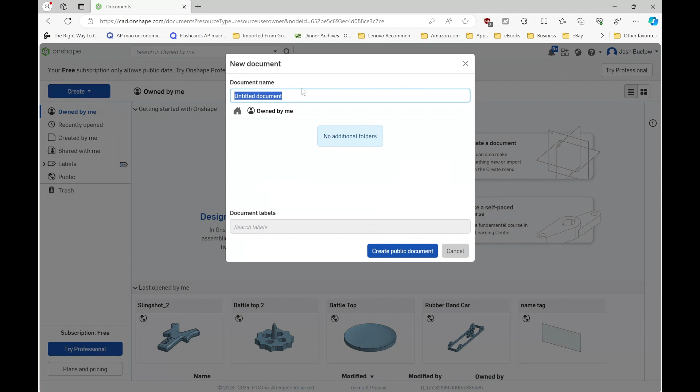Once we're in the workspace, we're going to click this top plane and make our sketch. I'm going to type N so that I'm looking right at it as soon as it prepares the sketch. So type N, and there we go.

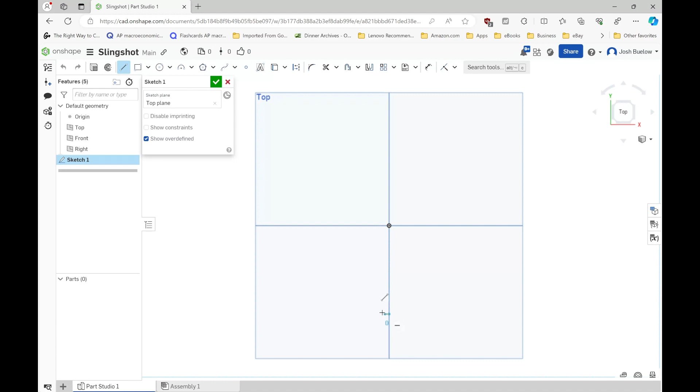Alright, so I'm only going to draw half the slingshot because I'm going to be able to mirror it. Directly below this center origin point, you can see it's highlighted orange, so I know that I'm on that. I'm going to click, go horizontal, go up, over at any angle, and back to the origin there.

And there we go. Now I'm going to dimension this. So actually, before I dimension it, I'm going to mirror it.

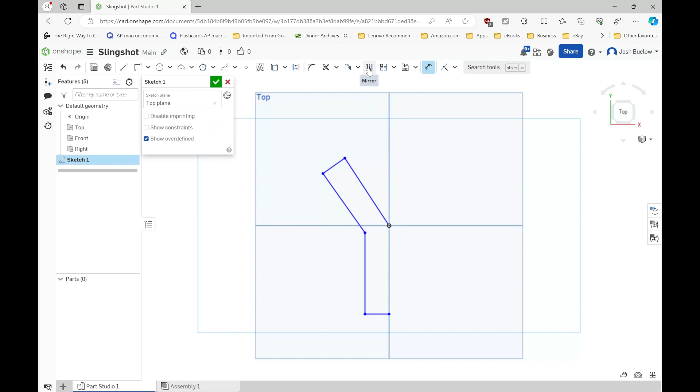So this is the mirror tool right here. I'm going to click this center line, and then I'm going to click everything that I want to mirror across that center line, like that. There we go. Now you only have to draw it once instead of drawing all these lines twice.

And if I dimension things afterwards, it will still stay correlated. So if I choose this right here, I make this 15, it'll make the other side just as big.

Now there are a few constraints I need to put on here, such as parallel, so that these two lines here are parallel, like that. And then I need to do a bit more dimensioning.

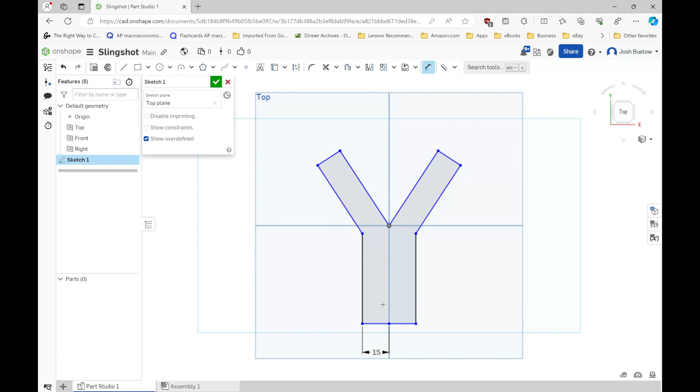So between the origin and this bottom line, I want to make that 85 millimeters. And I already know how wide I want it to be. I already got that dimensioned, but I need to decide how wide I want this to be.

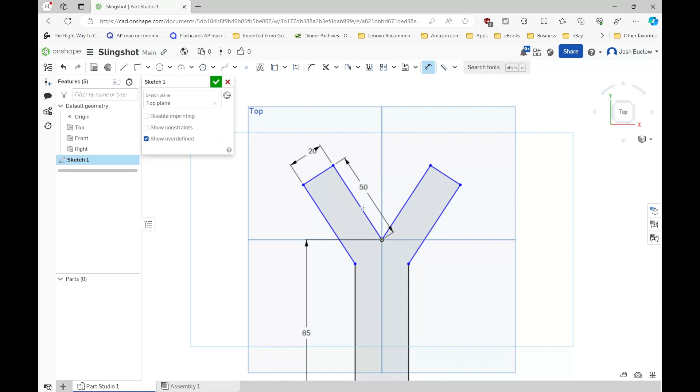So let's make that 20 millimeters. And let's make this 50 millimeters long. And let's make this angle 30 degrees. There we go.

So as you can see, this is our base shape of our slingshot. So I'm going to click the green check mark. There we go. And then extrude this.

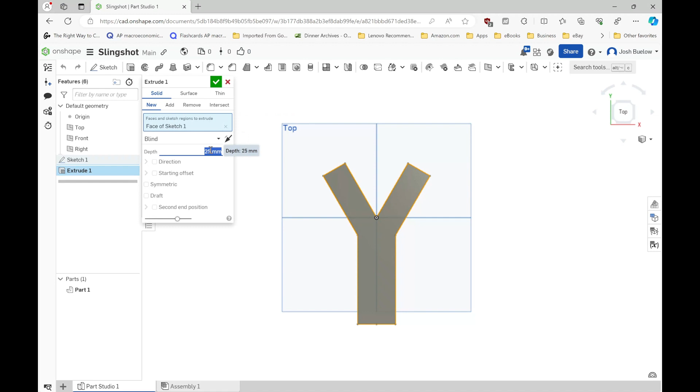So I'm going to click on my sketch face and click extrude. And I want this to be 15 millimeters thick.

There we go. Now obviously this won't work just as you can see it because we need somewhere for the rubber band to go for the slingshot.

So I'm going to make a cut by first making a sketch. Click on this face, type N so I'm looking right at it, and click sketch.

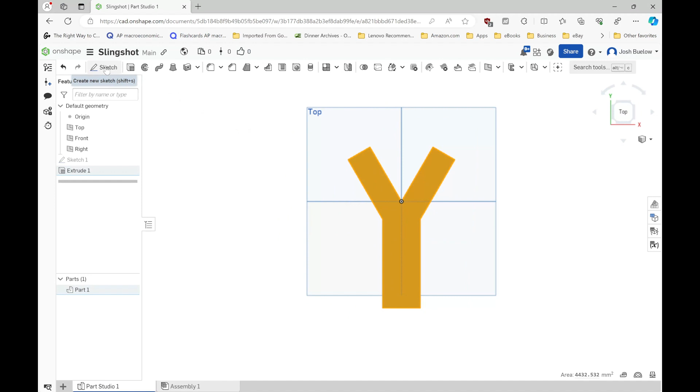There we go. We're going to use mirror again to make this nice and easy, but you're going to use this rectangle tool, click the arrow for the drop down, and click aligned rectangle. Now I'm going to click about the center on here, click 2 points, and drag down.

This is a way bigger slot than I want, so I'm going to change these dimensions. I'm going to make this 2 millimeters wide, and then I'm going to make this 10 millimeters deep, and click escape, and then I can drag this anywhere I want.

I mean, it doesn't have to be exactly in the center, but get as close to the center as you can. Now I'm going to use the mirror tool.

Once again, click the line I want to mirror it across because I want this box that's going to become the slot we cut out over here.

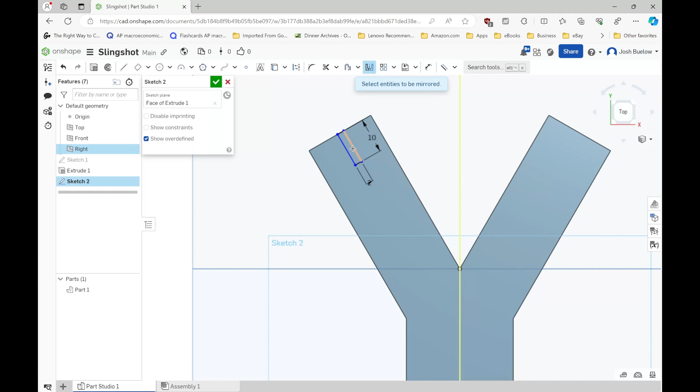So I clicked my line I want to mirror, and then I'm going to click all of the lines that I want over there, and you can see they're appearing as I click them.

There we go. So now we have our whole box on both sides. That's going to become our slot.

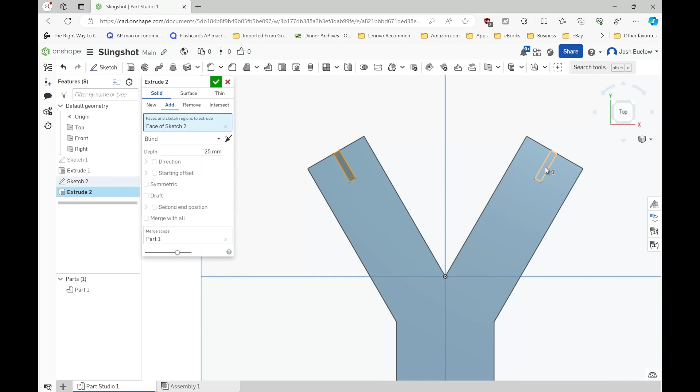And we're going to click extrude, and 1, 2. There we go. And we want to remove material because we want to cut this slot out just like that, as you can see. So green check mark. And there we have it.

So before I go and add my fillets to make this nice and smooth so it doesn't cut into your hand while you're using it, maybe I want to make this look a little bit cooler.

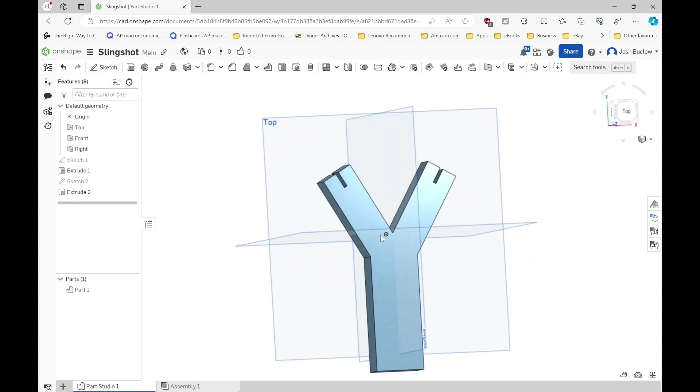So if I want to do that, I can go back into my first sketch, double click it, type N so I'm looking right at my sketch, and maybe I want to add some like spikes down here or something. So I click the line tool and click pretty much anywhere I want on here.

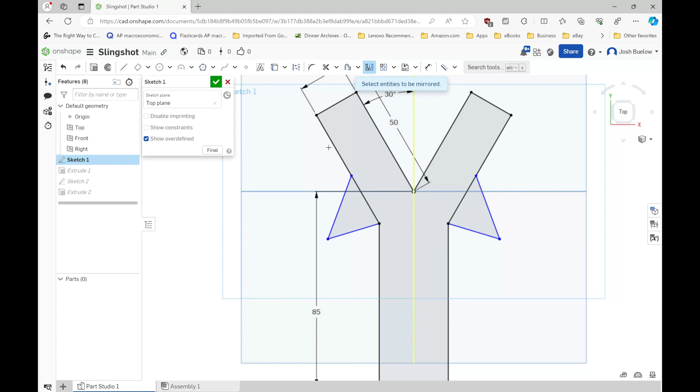Do something like that. Maybe that's the kind of spike I want. I'm going to once again mirror it across this plane here. Click the entities I want to mirror. And there we go. Then I just need to get rid of this line here and this line here so that it's one continuous outline, and it'll extrude differently. I think that looks pretty sweet.

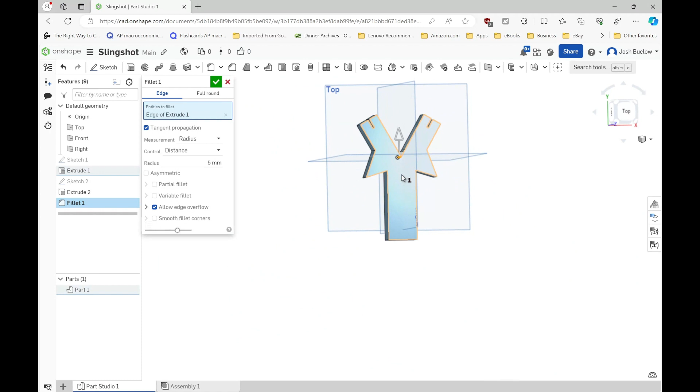Next thing we're going to do is add all of our fillets or rounds to make it nice and smooth, so it doesn't cut into your hand. It's going to default to 5 millimeters, and that's what I want, so I'm going to go 5 millimeters there and there and there. For most of this, pretty much any sharp corner you see, you're going to want a 5 millimeter fillet on.

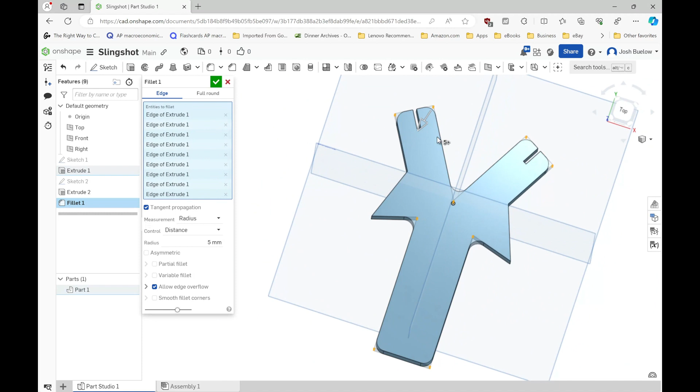Like that. Green check mark. Then I'm going to add some fillets in here as well. I want these to be a little bigger than 5 though, so it's a bit smoother of a transition. So if we go 15, I think that looks a little better.

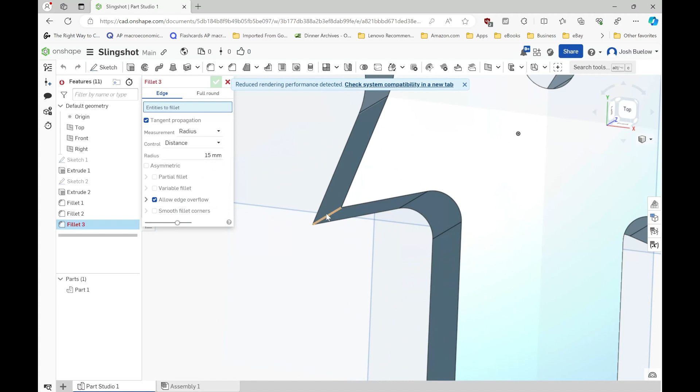Then I want another round or fillet on these sharp tips, but you can see if I have a really, really big fillet, it kind of gets rid of the whole spike. So let's make this 5 millimeters and see what it looks like. I think I want it even pointier than that. Let's go 2 millimeters. I think I like that.

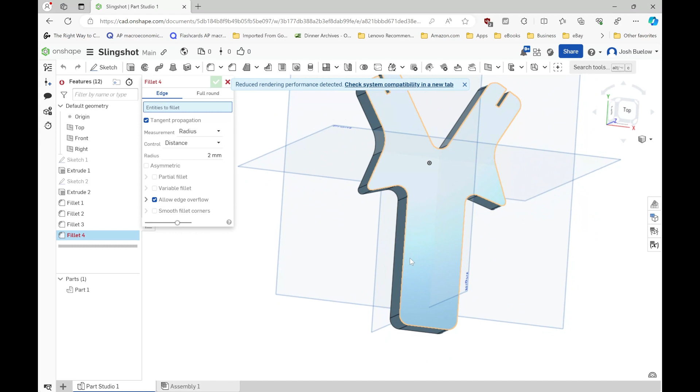Green check mark, and then we're going to do the last fillet that's going to save this from cutting into your palm. Just click on this edge here and this edge here and make this 5 millimeters. Then same thing on the other side. There and there. And there we go.

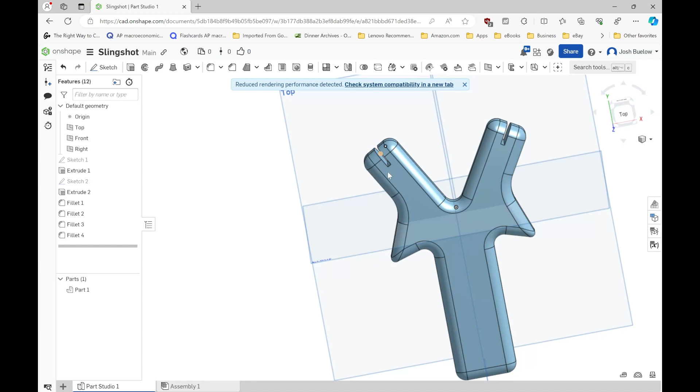So as you can see, your rubber band is going to slot into this here and then go between these two, and you can shoot things with it. We're probably going to do paper stingers. I'll show you what those are.

Last thing you can do is put your name on it so that once we print it, you know which one is yours. So we're going to click on this face here, type N so we're looking right at it, and make a new sketch once again. Just like with our very first project, the name tag, we're going to use the text tool here. I'm going to drag or click, drag without holding down, and click again. And that is my box.

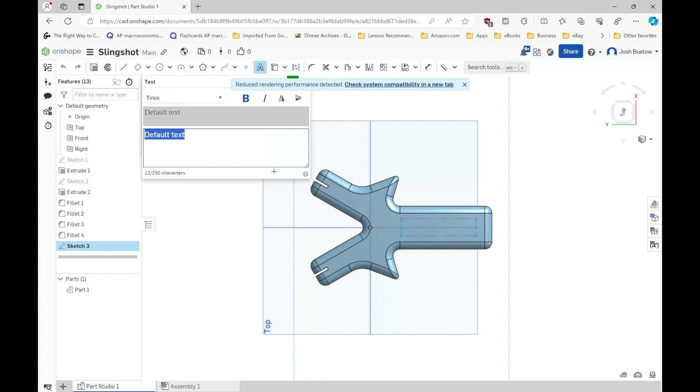I'm going to put my name, and I don't think I like that font. So let's go with that font. There we go. I need to get rid of that. Green check mark. Ooh, it went sideways. So how can we fix that?

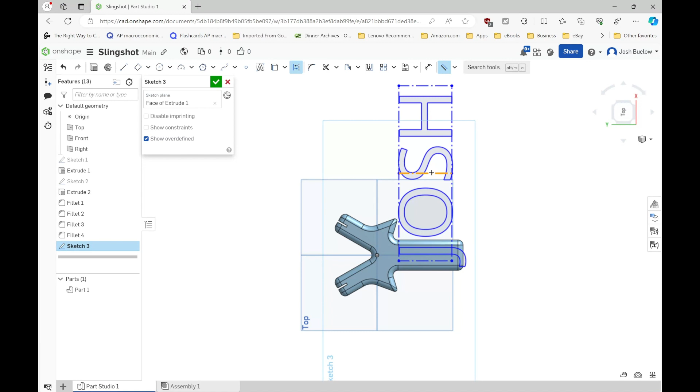We can use the parallel constraint again, so that this line, or any line that's horizontal right now, is vertical. I'm going to use parallel here. Click that line, and click this vertical line, and it's going to yell at me. It's yelling at me because it says that this wants to be horizontal. We don't want that, so we click escape, click on that line, and click delete.

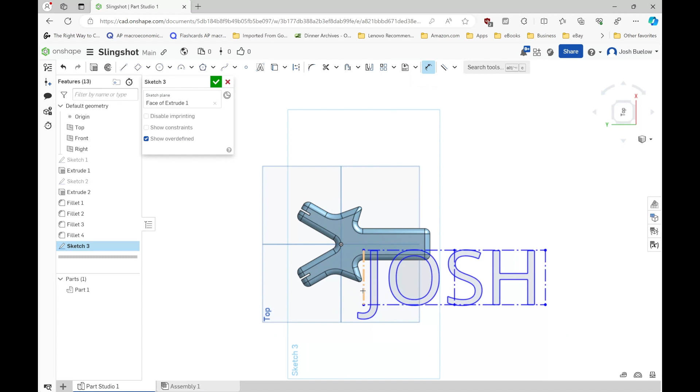Now it is in the right orientation for a slingshot, but it's way too big. So we can use our dimension tool, grab this edge here, click, drag, click, and I've found that I want this to be about 17 millimeters if it's going to fit nicely on here. I'm going to click escape so I'm no longer in my dimension tool, grab any corner, and then I can drag this where I want it to be. So I think I want it about there.

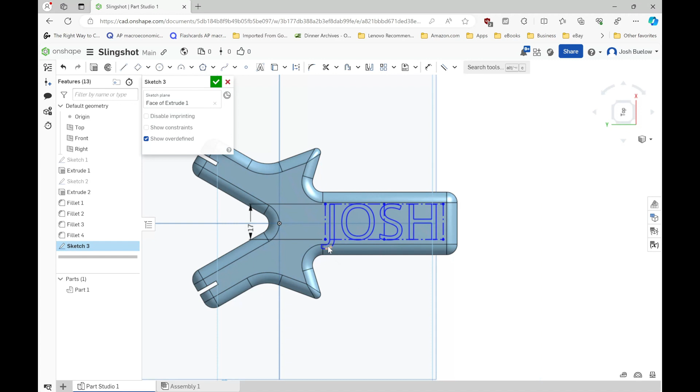You can see on mine the J hangs down a little bit from the box, so I'm probably going to have to get a little bit smaller. So let's see what 15 looks like. I can probably get that to fit on my slingshot. Yeah, I like that. So green check mark.

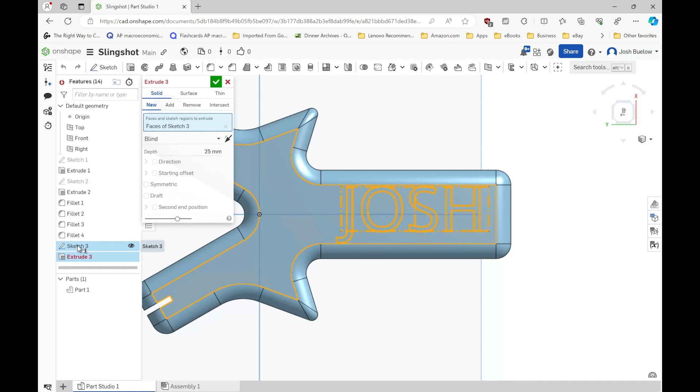We're going to extrude cut this name into the slingshot by clicking that sketch we just made, and click remove. Now this is set to a default of 25 millimeters, which means it's going to cut all the way through. If you want that, that might look kind of cool, you can go with that. I don't want it to cut all the way through on mine, so I'm just going to make it 3 millimeters deep so that you can still read it. Then we click the green check mark, and there you go. There's your slingshot.

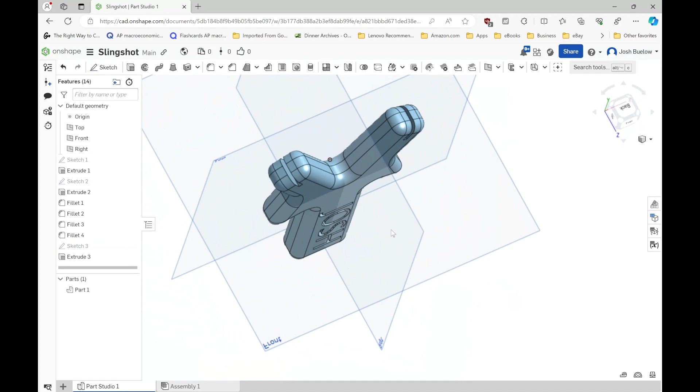So in this video, you learned how to use the mirror tool, and let me know so we can get this printed for you.